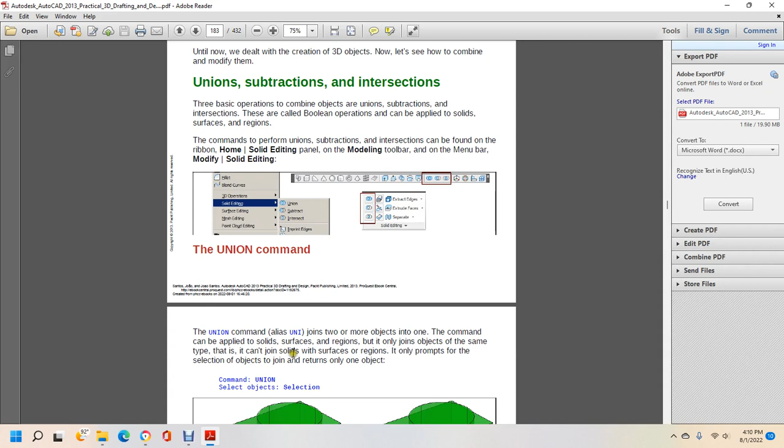The union command, alias UNI, joins two or more objects into one. The command can be applied to solids, surfaces or regions, but only objects of the same type. That is, it can't join solids with surfaces or regions. It only prompts for the selection of objects to join and returns only one object. Command: UNION, select objects.

Duplicated volumes are removed. The command can be applied to solids and regions that do not share a common volume or area. In this case, we get one object despite having separated volumes. For 3D meshes, upon selection the command prompts the conversion to solids or surfaces.

Applying union to surfaces is of minimum interest; in case we need to perform operations on surfaces, the commands presented in Chapter 12, Meshes and Surfaces, are more useful.

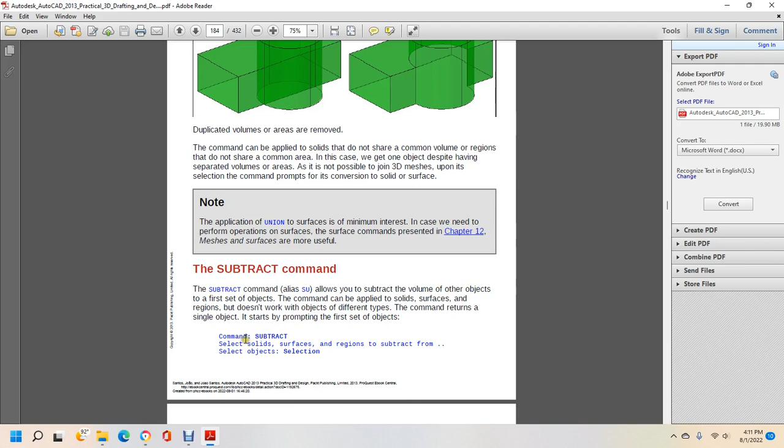The subtract command, alias SU, allows you to subtract the volume of other objects from a first set of objects. The command applies to solids, surfaces and regions and does not work with objects of different types. The command returns a single object and starts by prompting for the first set of objects. Command: SUBTRACT. Select solids, surfaces or regions to subtract from, select objects.

Then it prompts you for the second set of objects. This volume set will be removed from the first. Select solids, surfaces or regions to subtract, select objects.

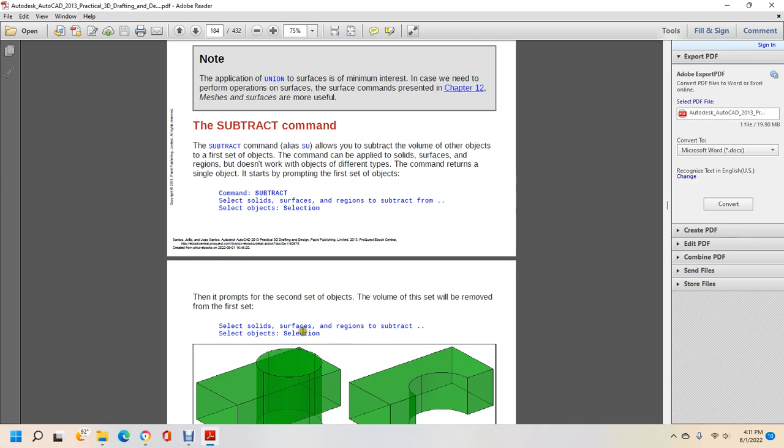Since version 2010, this command allows subtracting coplanar surfaces, and also subtracting a solid from a surface. Applying the command to subtract non-coplanar planar surfaces results in erasing the second set of surfaces, while nothing happens to the first set.

The intersect command, alias IN, allows the intersection of objects. Applied to solids, it returns the common volume; applied to regions or coplanar surfaces, it returns the common area; applied to non-planar surfaces, it returns the intersecting spline. The command just prompts for the selection of objects and returns only one object. INTERSECT, select objects.

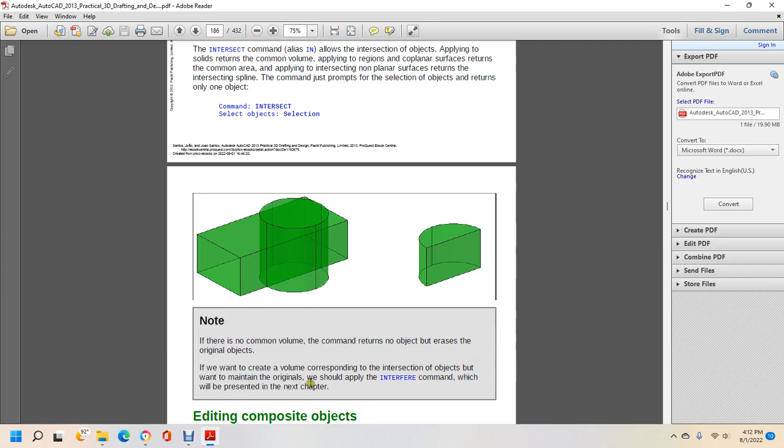Note, if there's no common volume, the command returns no object but erases the original objects. If you want to create a volume corresponding to the intersection of objects but want to maintain the originals, we should apply the interfere command, which will be presented in the next chapter.

Editing composite objects. Under some conditions we are able to modify the original components of a composite object. Composite objects obtained by union, subtraction, intersection have a recorded history that keeps track of the original components. We may edit them by modifying these components. With recorded history we have access to the original components. We may select the solids to combine and set History to Record on the Properties palette.

By default, solids do not record history. If we want all solids to record history upon their creation, we have to change the SOLIDHIST variable to 1. By default, it is 0.

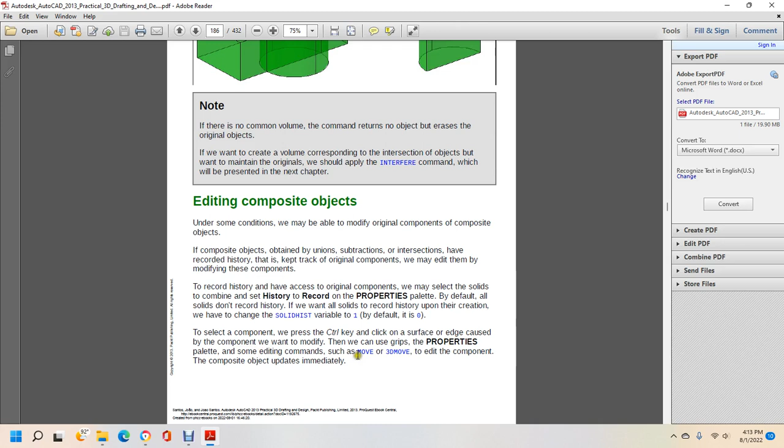To select a component, we press the Ctrl key and click a face or edge of the component we want to modify, then we can use grips, the Properties palette and some of the editing commands, such as MOVE or 3DMOVE, to edit the component, and the composite object updates immediately.

The SHOWHIST variable specifies whether component objects are displayed even if we don't select them with the Ctrl key. With value 2, component objects are always displayed. With value 1, it depends on the individual properties. With value 0, they are never displayed.

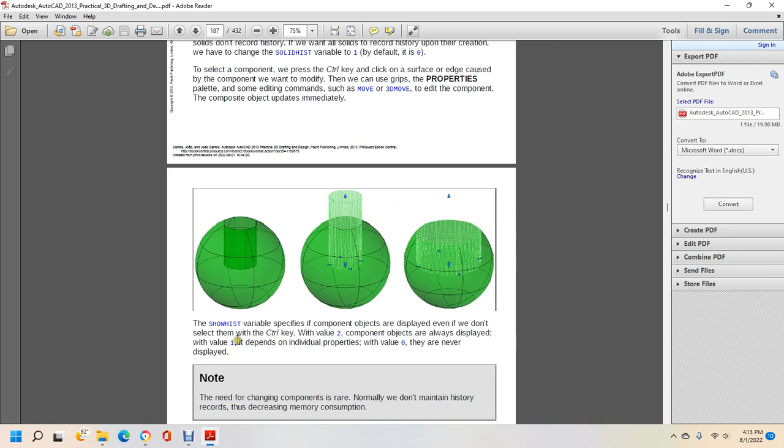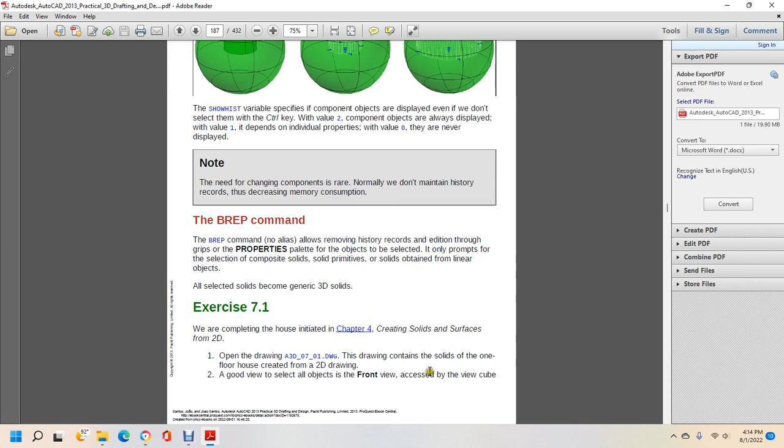Exercise 7.1. We are completing the house initiated in Chapter 4, creating solids and surfaces from 2D, opening the A3D 0701 drawing, containing the solids of the one-floor house, created from the 2D drawing, with the front view accessible by the ViewCube. Unite all walls and solids above the doors with the UNION command, selecting all 18 solids of the 3D walls by a crossing window from right to left, above the windows and below the upper slab.

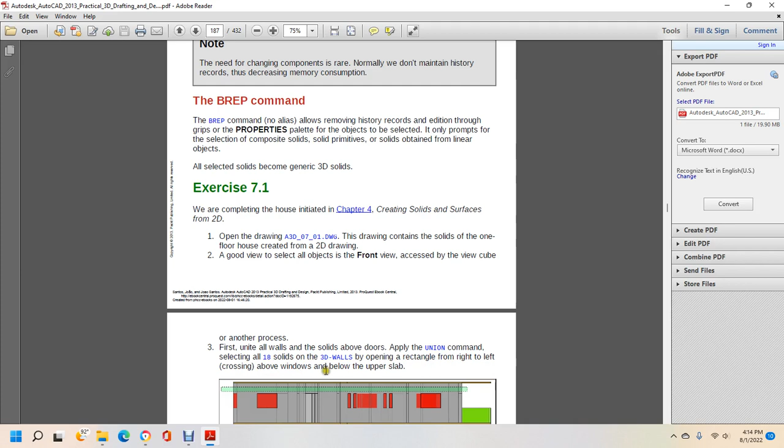We apply SUBTRACT to select all object walls. Press Enter and select all windows from left to right. Include all the windows completely. Orbiting, eventually hiding the upper slab, we can verify the model's correctness. Save the drawing with the name A3D 0701 final.

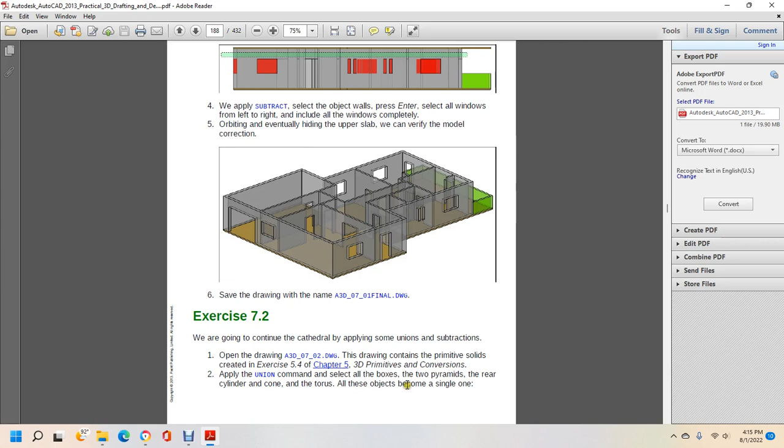Exercise 7.2. We're going to continue the cathedral applying the same union and subtraction. Open the A3D 0702 drawing. The drawing contains primitive solids created in exercise 5-4, Chapter 5, 3D primitives. Apply the UNION command. Select all the boxes, 2 pyramids of the rear, cylinder, cone, and torus. All these objects become a single one, and create the buttress.

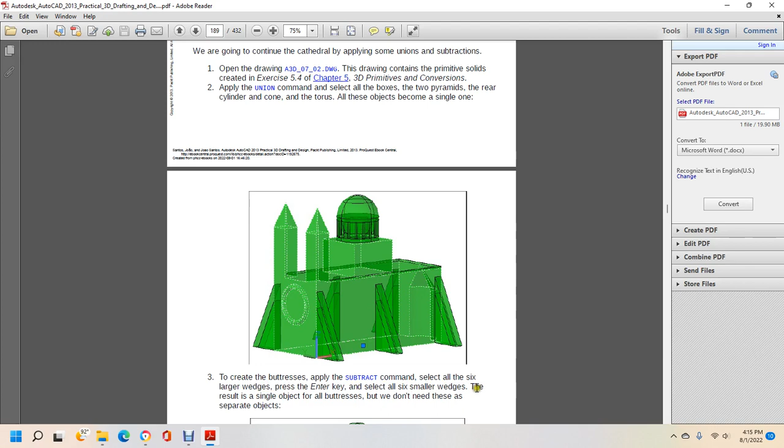Apply the SUBTRACT command. Select all the 6 larger wedges, press the Enter key. Select the 6 smaller wedges and resolve into a single object. All buttresses will be needed; we don't need these as separate objects. And then we save the drawing with the name A3D 0702 final. Later we will cut the summit and make a hollow in the big block.

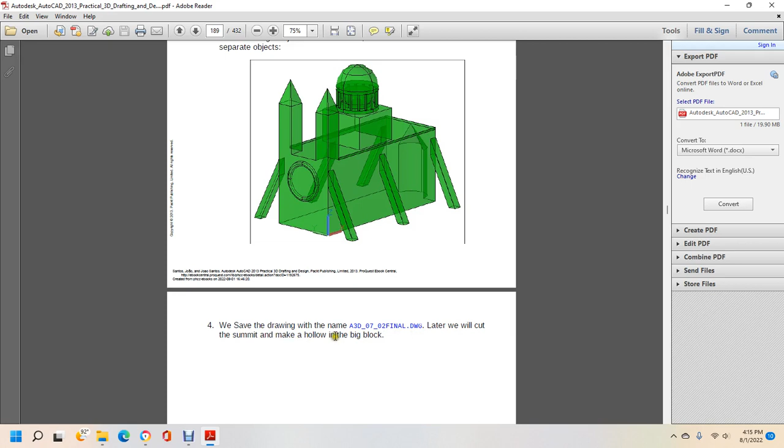We start the command selecting the object to cut: command SLICE, select objects to slice. By default, you define a vertical cutting plane specified with 2 points. Specify start point of slicing plane or planar object, surface, Z-axis, view, XY, YZ, ZX, or 3 points. Specify second point on plane. Then we specify the point indicating the part we want to maintain: specify a point on the desired side, or keep both sides.

Alright, several useful options are available for this command. Planar object: the cutting plane is defined by a planar object to be selected, such as a circle, ellipse, arc, 2D spline or 2D polyline. The surface option allows you to specify a non-planar cutting object, selecting surfaces that intersect the whole objects to be sliced.

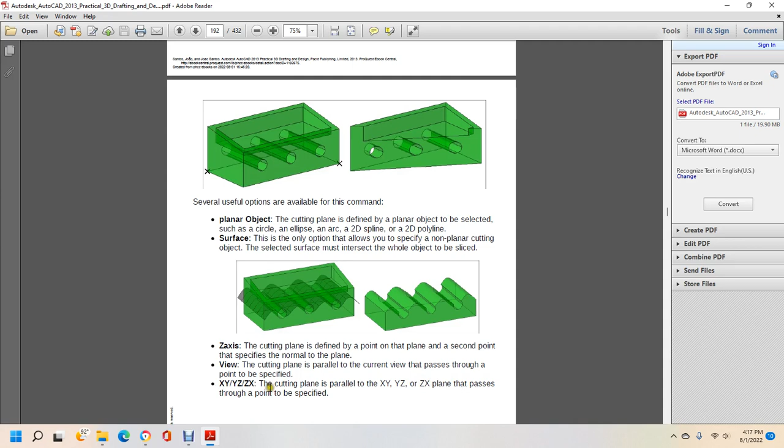Z-axis: the cutting plane is defined by a point on the plane, and the second point specifies the normal of the plane. View: the cutting plane is parallel to the current view and passes through a point to be specified. XY, YZ, ZX: the cutting plane is parallel to XY, YZ, or ZX, a plane that passes through a point to be specified. Alright, and this shows your XY, YZ, and ZX.

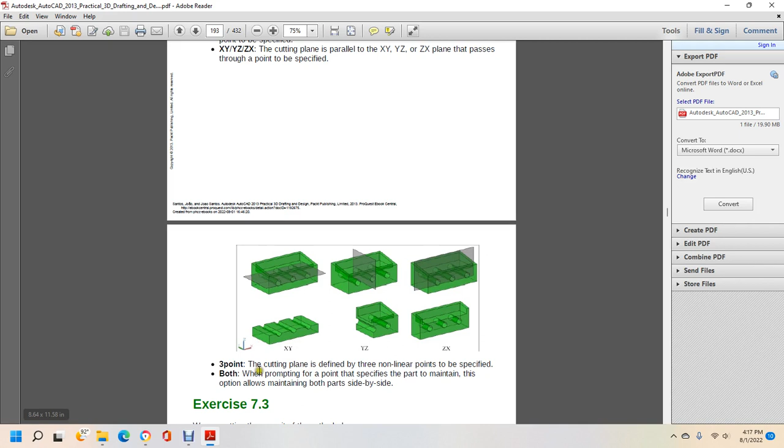A 3-point cutting plane is defined with 3 non-linear points, specified with the prompt for the part to maintain, with options allowing you to maintain parts side by side.

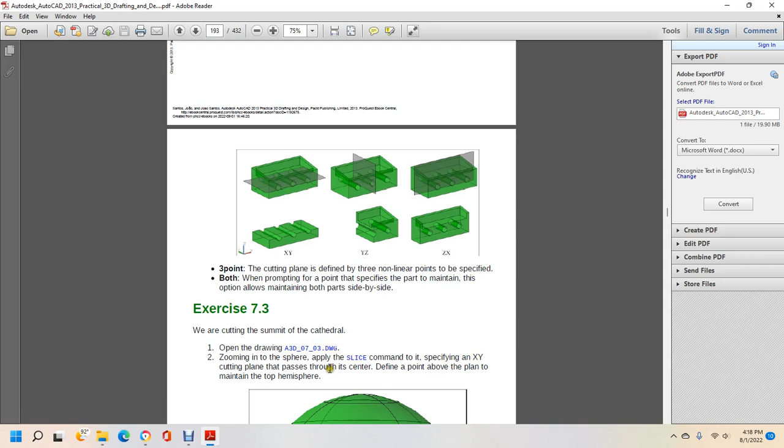Exercise 7.3: cutting the summit of the cathedral. Open drawing A3D 0703, zoom in on the sphere, apply the slice command to it, and specify the XY cutting plane passing through the center to define a point above the plane, in order to maintain the top hemisphere. Save the drawing named A3D 0703 final. Later we will finish this building.

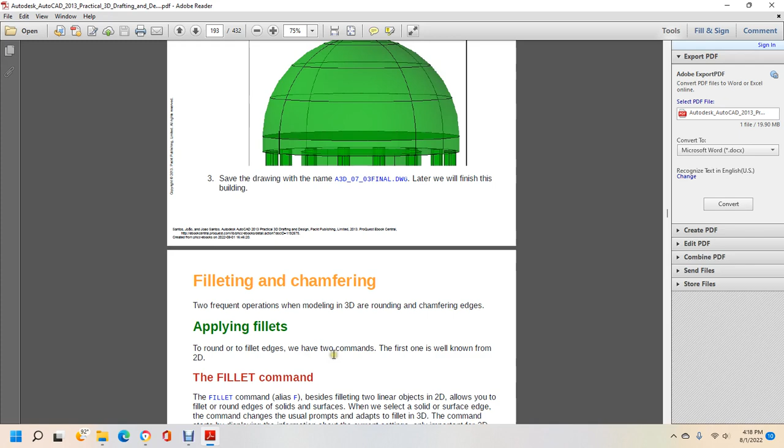Fillet and chamfer are two frequent operations in 3D modeling: rounding and chamfering edges. To apply fillets and round the edges, we have two commands. The first one is well known from 2D: the fillet command, with alias F.

Besides filleting two linear objects in 2D, it allows you to fillet and round edges. For solid surfaces, select the solid and surface edge option of the command, which changes the usual prompt for the 3D fillet command. The command displays information about the current settings, and the only important prompt is the selection of the first object.

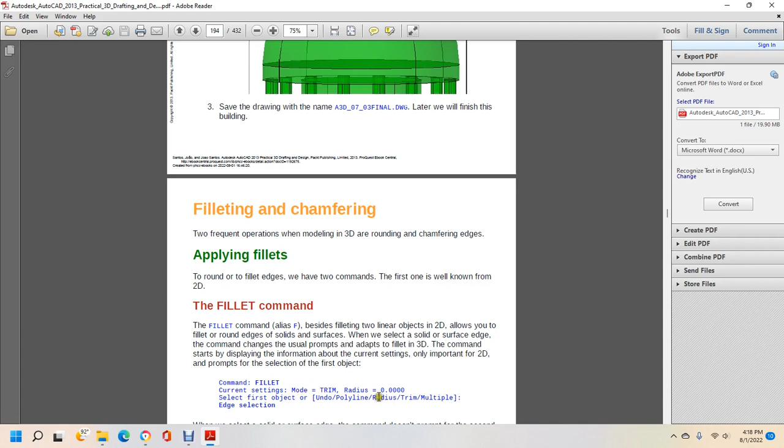Fillet current settings: mode, trim, radius. Select first object, undo, polyline, radius, trim, multiple edge selections. When you select the solid surface edge option of the command, it does not prompt for a second object, but instead prompts for the radius - enter the radius as an expression or value.

Then we click all the edges to be filleted one by one. Only one from the selected solid surface edge, picked for the object selection, already belongs to the selection. After selection, all edges are filleted and the command displays information.

Select edge, chain, loop, or radius for edge selection or for fillet, and it shows the fillet radius at the bottom. Note: for internal edges, the fillet adds material; for external edges, the fillet removes material.

Note: if the edge is internal, the fillet adds material. If the edge is external, the fillet removes material.

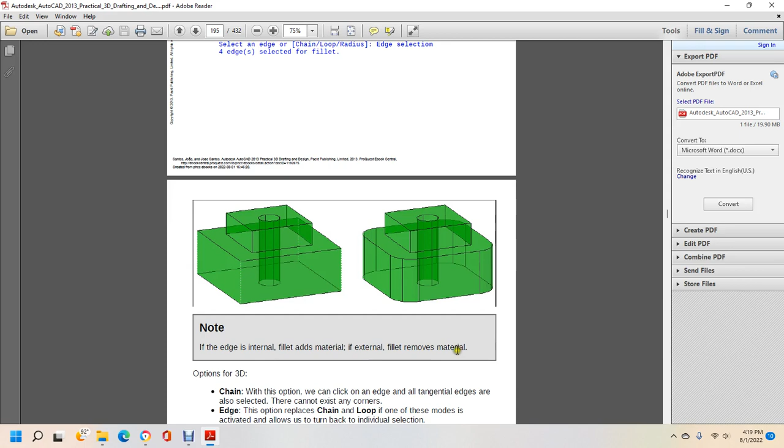Options: Chain - with this option, when we click an edge, all tangent edges are also selected; they stop at any corners. Edge - this option replaces chain or loop; if one of those modes is activated, it allows us to return to individual selection.

Loop - this option allows selecting a sequence of edges, even non-tangent ones, as edges shared by two faces, and prompts you to accept the highlighted face or choose next.

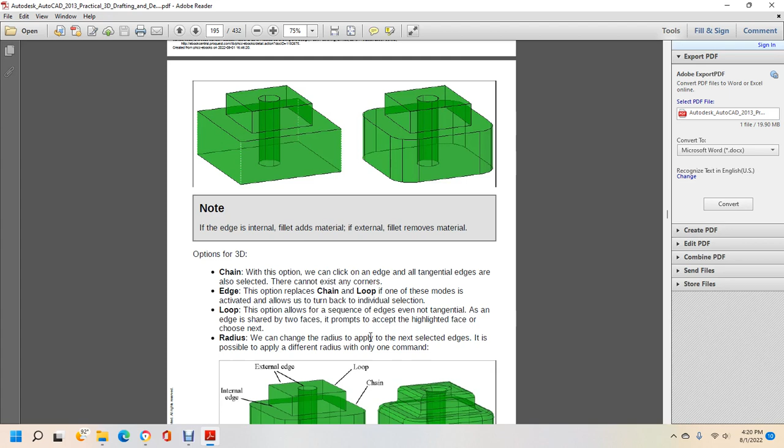Radius - we can change the radius to apply to the next selected edges. It is possible to apply different radii within only one command: the fillet edge command. I'm going to pause the tape there.

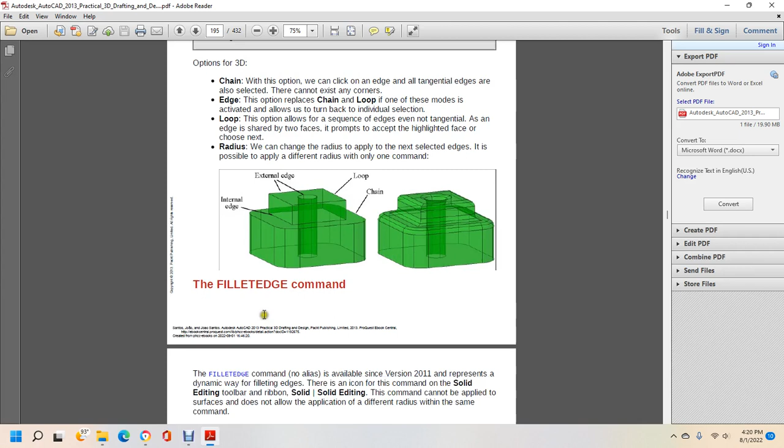Now, the fillet edge command. The fillet edge command, with no alias, is available since version 2011. It's a more dynamic way of filleting edges. There's an icon for the command in the solid editing toolbar and ribbon solid editing. This command cannot be applied to surfaces, and it does not allow applying different radii within the same command.

The command displays the current default radius prompt. The edge selection is repeated until Enter is pressed, and a preview is applied to the model. Command: fillet edge, radius default, selection edge, chain, loop, and radius selection.

Select edge, chain, loop, radius selection. Two edges selected for fillet. Solid display transparent. We press enter to select the grip default radius.

Apply the radius option: click and drag the small triangular grip to dynamically specify the radius, then press enter to accept the fillet and radius, or drag the grip. Specify radius or exit, and finally we press enter to accept the fillet and radius, then enter again.

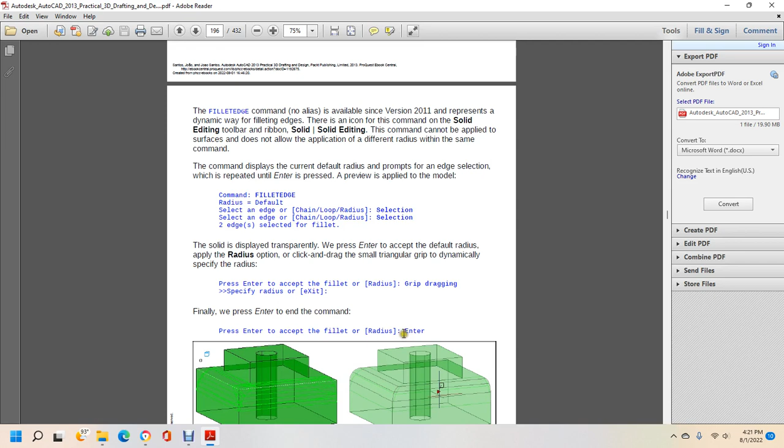The options of this command are similar to the previous command: Chain - the option for selecting the chain, clicking on edges, all tangent edges are also selected, and corners stop the selection. Edge - replaces chain and loop; if one of these modes is activated, it allows you to turn back to individual selection.

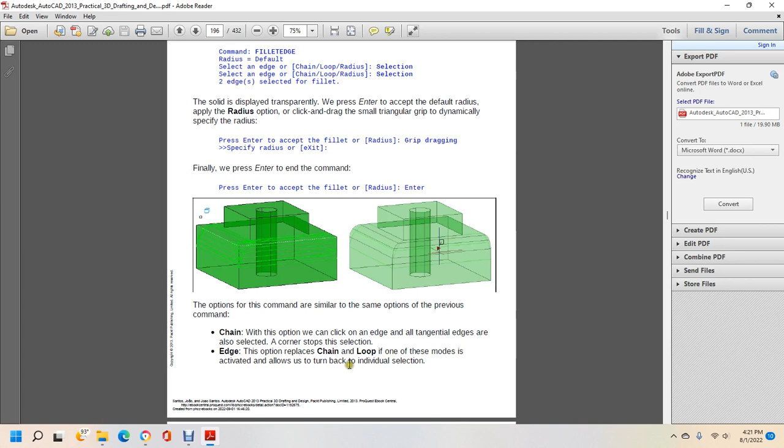Loop - the option allows you to select a sequence of edges that are even non-tangent, as edges shared by two faces, and prompts you to accept the highlighted face or choose next for the radius.

We change the default radius for all selected edges. The FILLETRAD3D variable keeps the last used radius for this solid and surface fillet command, and the PREVIEWCREATIONTRANSPARENCY variable controls the preview transparency.

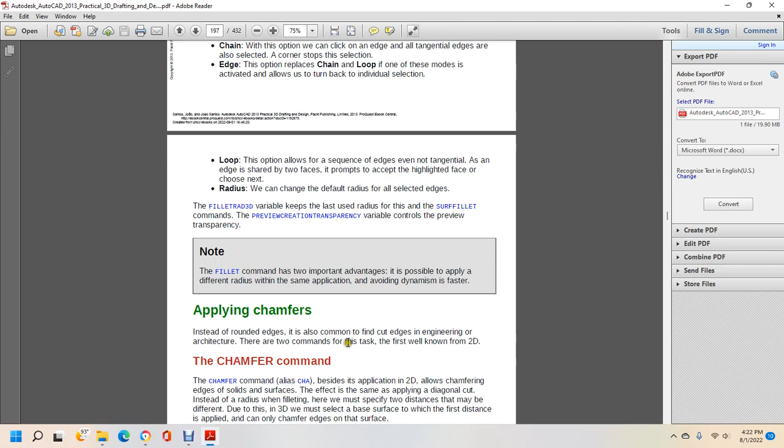Alright, applying chamfers instead of round edges is almost commonly found with the cut edge of engineering and architecture, with two commands for the task. The first, well-known in 2D, is the chamfer command, alias CHA. Besides the 2D application, it allows chamfering edges for solids, applying a diagonal cut.

Instead of the radius when filleting, you must specify two distances that may be different due to this. In 3D, you must select the base surface of the solid for which the first distance is applied. You can only chamfer edges on the surface.

We select the edge of the solid surface and the command displays different options, starting with the selection of the base surface. Command chamfer: trim mode, current chamfer distance, and distance 2. Select first line or undo, polyline, distance, angle, trim method, multiple selection, base surface selection.

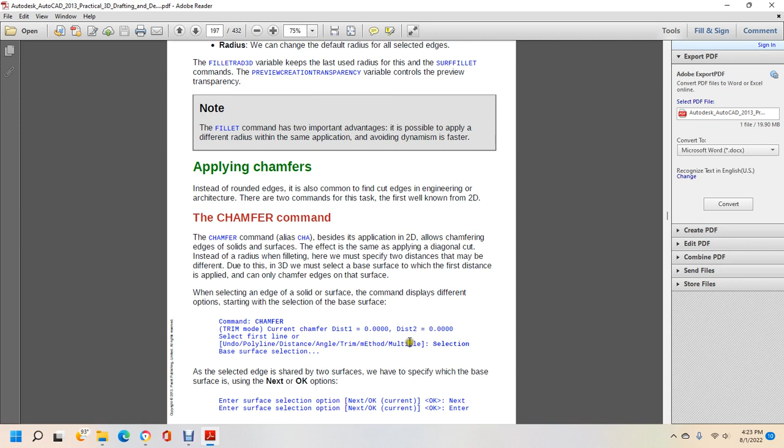As the selected edge is shared by two surfaces, we have to specify which base surface is used, by next or OK options. Enter surface selection option, next or OK or current, enter.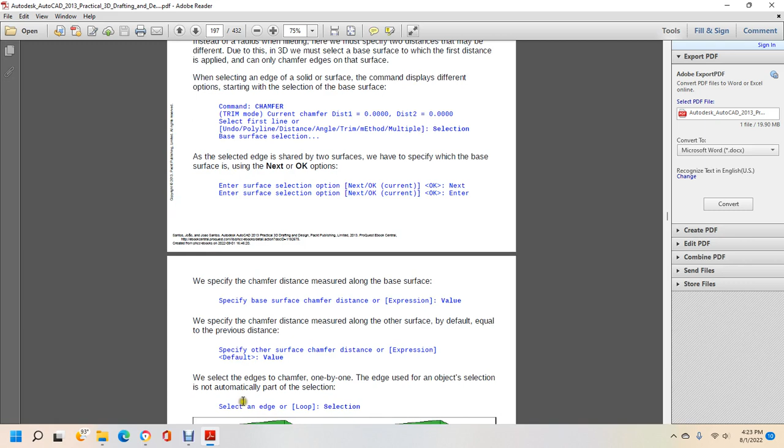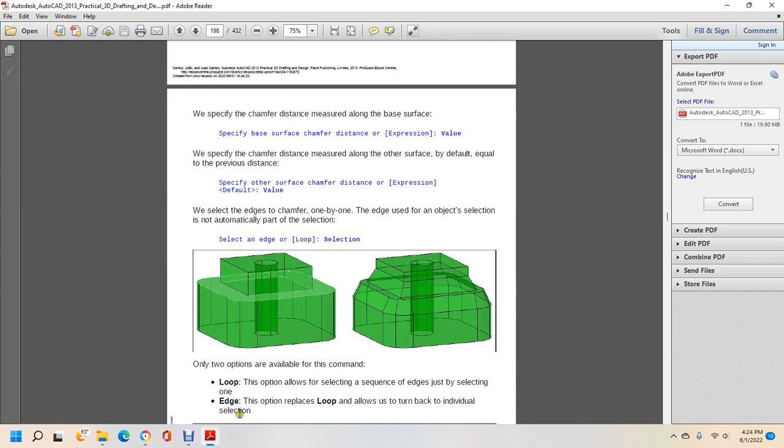Now we select the edge and chamfer one by one. The edges used for the object selection are not automatically part of the selection. Select edge or loop selection, and then it shows you that only two options are available for this command: loop, which allows selecting a sequence of edges just by selecting one, and edge, which replaces the loop option and allows you to turn back to an individual selection.

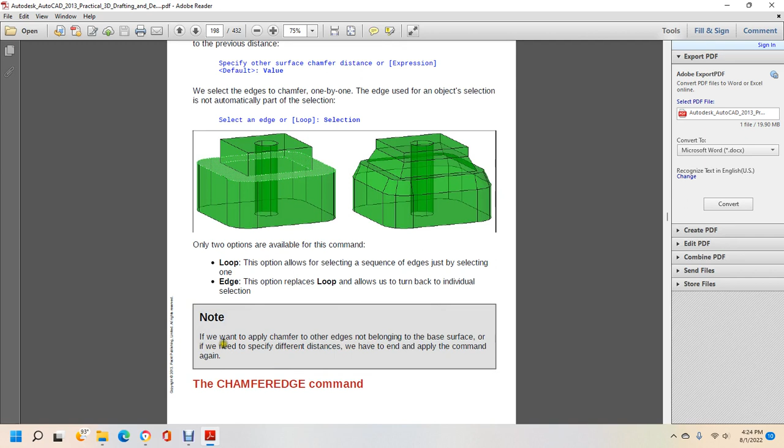If you want to apply chamfer to other edges not belonging to the base surface, we need to specify different distances. We have to end and apply the command again.

Chamfer edge command.

As with fillets, we have a second command to apply chamfer, this one being dynamic. Chamfer edge is the command, no alias, available since version 2011. It represents the dynamic way of chamfering edges. There's an icon command with the solid editing toolbar, ribbon, Solid and Solid Editing. This command cannot be applied with surfaces; the command displays the current default distance at the prompts.

Select an edge: loop, distance. Select another edge on the same face, loop, or distance selection. Once you've selected all your edges, press enter. The solid is displayed transparently with the default distance or the distance option.

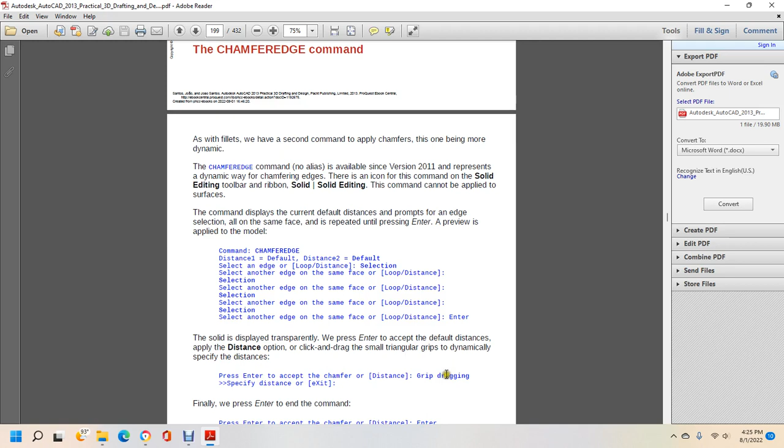Click and drag the small triangular grips to dynamically specify the distance. Press enter to accept the chamfer distance with gripping and dragging, specify the distance, or exit. We press enter to end the command, or press enter to accept the chamfer distance and enter.

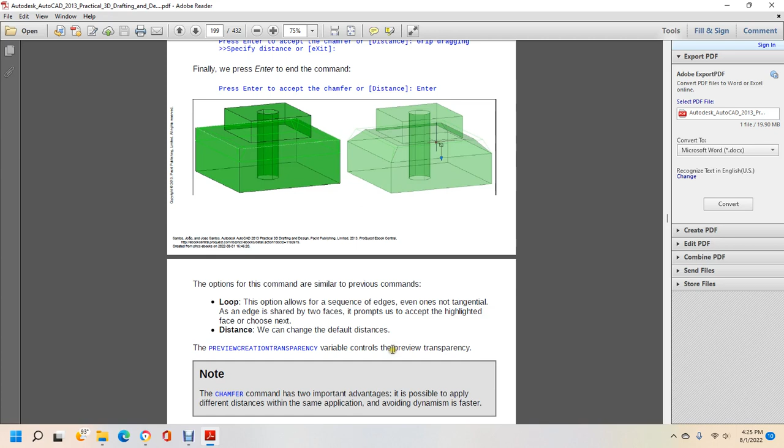These options are similar to the previous command's loop option, which allows you to select a sequence of edges, even ones with non-tangent edges shared by two faces, at the prompt. You accept the highlighted face or choose next. In distance, we change the default distance; preview creation transparency is a variable to control the preview transparency. The two important advantages of the chamfer command are the possibility to apply different distances in the same application, avoiding dynamism, and being faster.

Alright, exercise 7-4. We're going to fillet and chamfer the edges of the bathtub, following drawing A3D0704. I'll apply the fillet command with a radius of 0.003 to all edges coming from the smaller box.

We'll subtract the bottom edge of the piece with the chamfer command, with distances of 0.505 and 0.1. The loop option, as always, is an easy way to select all four edges. Finally, apply the fillet command to all the exterior vertical edges of the sign with a radius of 0.06.

Save the drawing as A3D0704 final drawing.

Editing solids and surfaces: there are prompts to edit solids and surfaces, namely changing parameters or properties using the Quick Properties palette and the Solid Edit command, which offers several useful options.

After solid or surface creation, it is very easy to change parameters with the Properties or Quick Properties palette. The Properties command, alias Control-1, is one of the most useful in AutoCAD. It's also excellent for modifying parameters that define a solid or surface, with a floating palette that can remain visible, displaying the parameters of the selected object.

When a solid is selected, there are three panels related to 3D: 3D visualization, geometry, and solid history. The first includes material and shadow display settings, important for rendering. The last includes the history of parameters of the composite object.

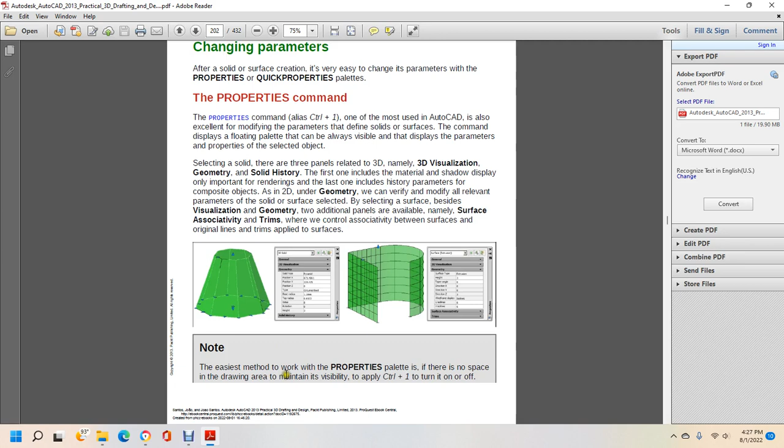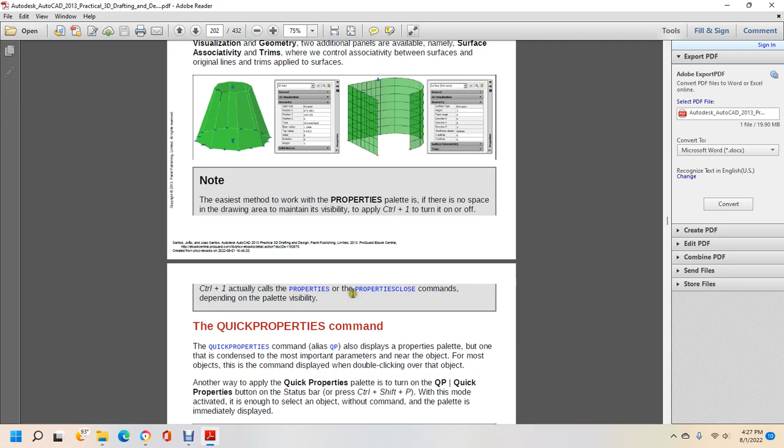The easiest method to work with the Properties palette, if there's no space in the drawing area, is to maintain it with auto-hide and apply Control-1 to turn it on and off. Control-1 actually calls the Properties or the PROPERTIESCLOSE commands depending on its current visibility.

Quick Properties Command: the alias is QP. It also displays a property palette, but considers only the most important parameters of the selected object. For most objects, it can also be displayed by double-clicking over the object.

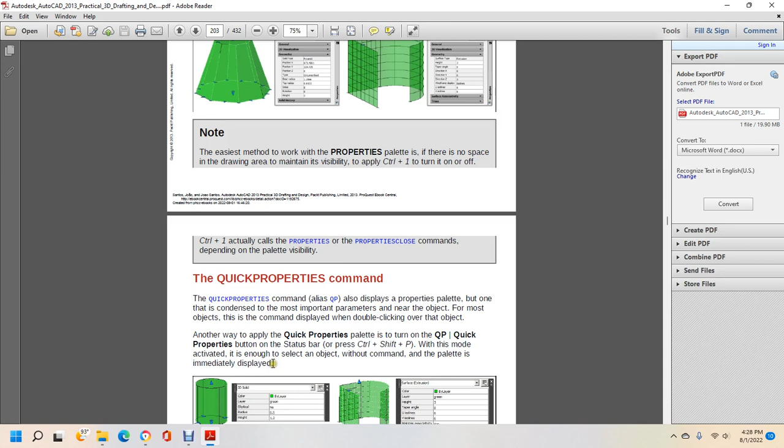Another way to activate the Quick Properties palette is to turn on the QP Quick Properties button on the status bar, or press Control-Shift-P. With this mode activated, simply selecting an object without a command will immediately display the palette.

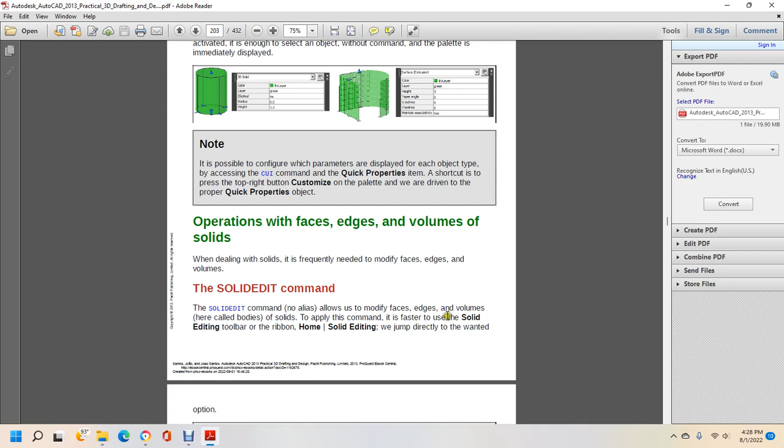To apply this command, the fastest way is to use the Solid Editing toolbar or the ribbon, under Home > Solid Editing, so we can jump directly to what we want.

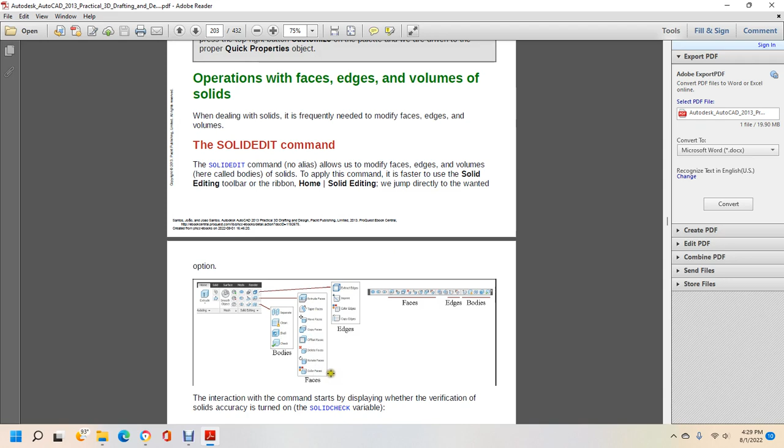The interaction with this command starts by displaying whether verification of solid accuracy is turned on. Solid check is a variable; the Solid Editing command automatically checks it, with Solid Check set to 1.

Next, the main command options display: Undo, to undo the last command option; Exit, to end the command. The remaining options are presented next: entering the Solid Editing options—Face, Edge, Body, Undo, and Exit.

The Face option: upon entering the Face option, we have several additional options, including Undo for the last applied option, and Exit to return to the previous level.

When selecting faces, the Undo and Remove options are available, allowing you to undo the last selection operation or enter the mode to remove faces from the selection.

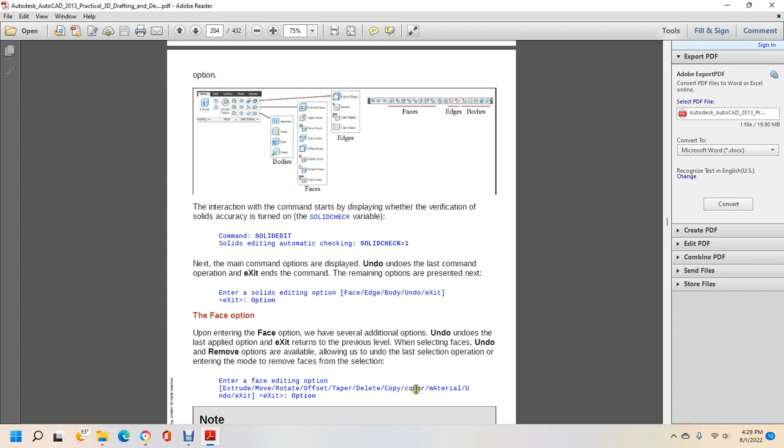The face editing options include: Extrude, Move, Rotate, Offset, Taper, Delete, Copy, Color, Material, Undo, and Exit.

Note that we must be careful when selecting faces: if you click an edge, both faces sharing that edge are selected.

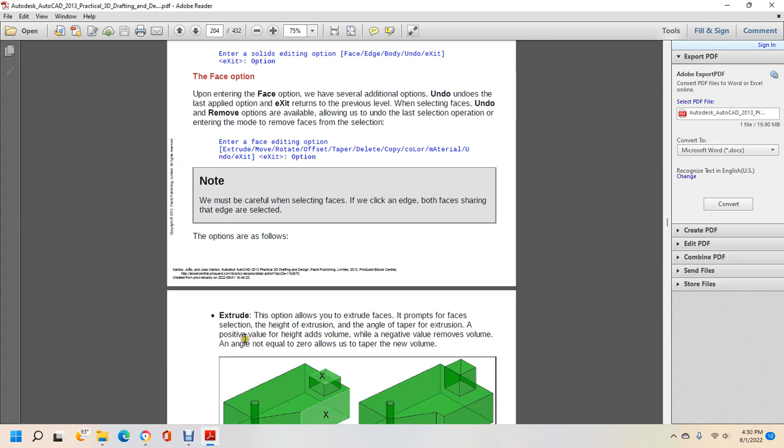The options are as follows. Extrude: this option allows you to extrude the selected faces, prompting for the height of the extrusion and the taper angle. A positive height value adds volume, while a negative value removes volume. An angle not equal to zero allows you to taper the new volume.

Move option allows you to move faces; after selecting, it prompts for the displacement, either as a distance or two points, similar to the Move command.

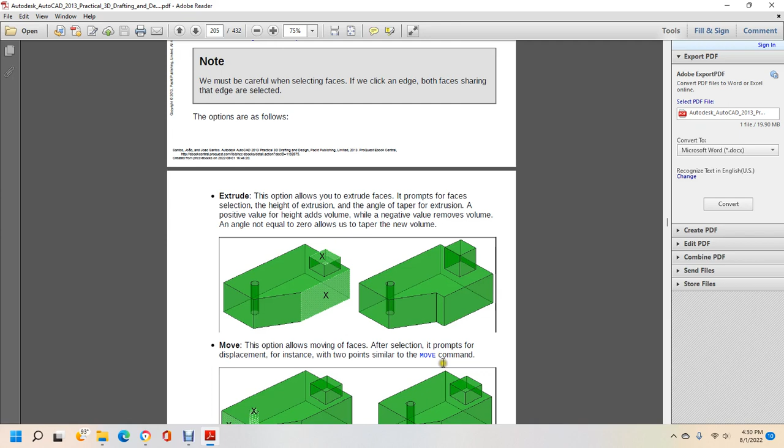Alright, rotate. This option allows you to rotate faces. After selection, it prompts for the axis, rotation angle, and rotation direction. The axis for the rotation by default is specified with 2 points, with additional options that allow you to use an existing object to define its axis, or an axis parallel to the X, Y, and Z axis of the current user

coordinate system. Alright, offset. This option allows the offsetting of faces for the creation of parallel faces. After selection, it prompts for the offset distance. A positive value increases the volume, a negative value removes volume, and when selecting continuous faces with a common edge, the faces extend so that their corner is corrected.

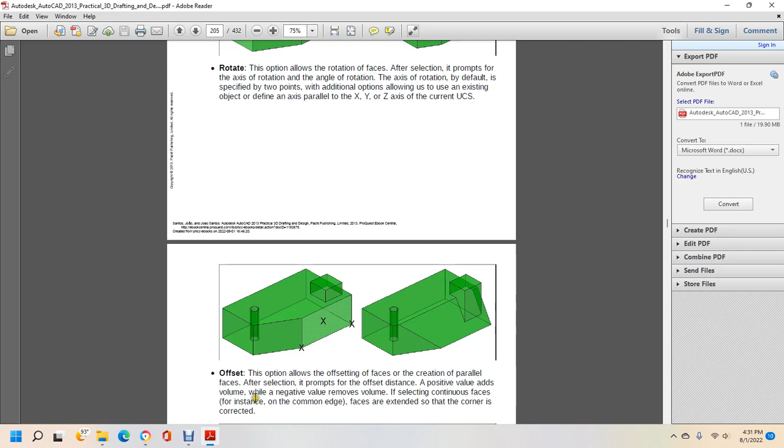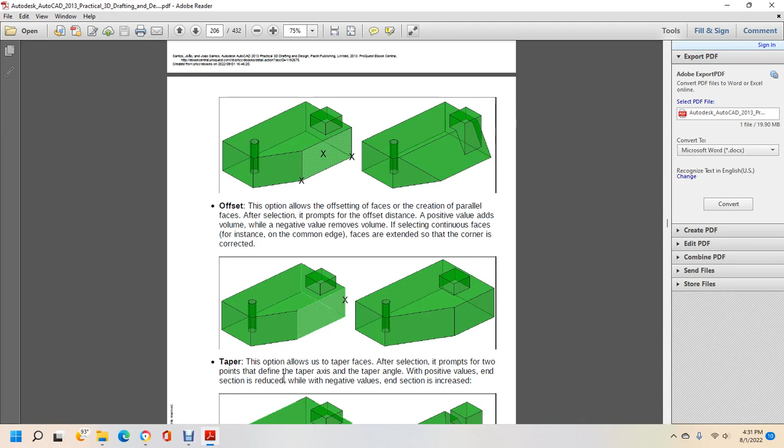Taper. This option allows you to taper faces. After selecting, it prompts for 2 points to define the taper axis and for the taper angle. With positive values the end section is reduced, and with negative values the end section is increased. Delete. This option allows you to delete faces, and AutoCAD will fill the spaces. Faces will be deleted.

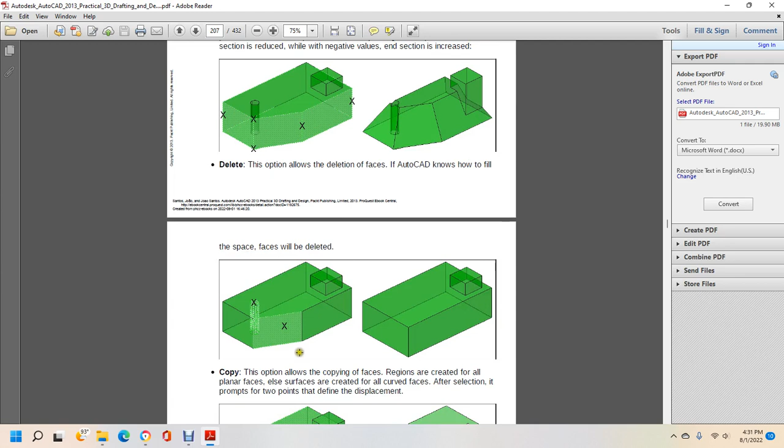Copy. The copy option allows you to copy faces, creating regions from planar faces and surfaces from curved faces. After selection, it prompts for 2 points to define the displacement. Color. This option allows you to change the color of selected faces. After the selection, it shows the select color dialog to choose the color to apply. Material. This option allows the application of material to selected faces.

In rendering, we can have different materials applied to a single object. After selection, it prompts for the name of the material to apply. This option has no icon. The color and material options have limited utility to apply materials to faces. There are other possibilities for which you don't need to type the material name.

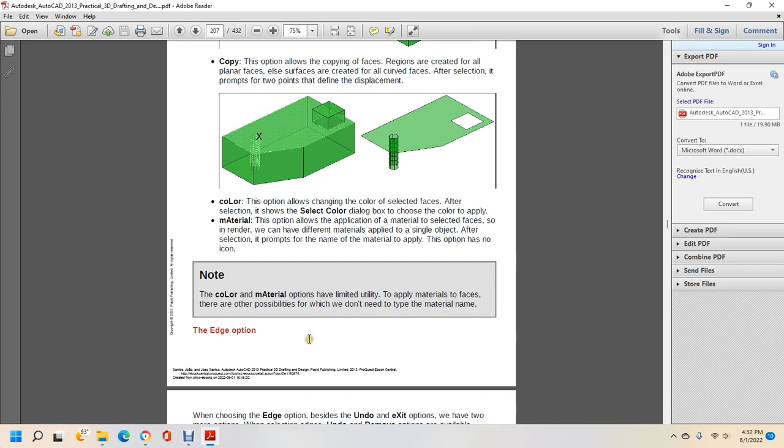The edge option. Choosing the edge option, besides undo and exit options, we have 2 more options. The undo or remove option allows you to undo the last selection operation, entering the mode to remove edges from selection. Enter an edge editing option: copy, color, undo or exit. Copy. This option allows you to copy edges; depending on the selected edges, arcs, circles, ellipses, lines or splines are created. After selecting, it prompts for 2 points that define the displacement.

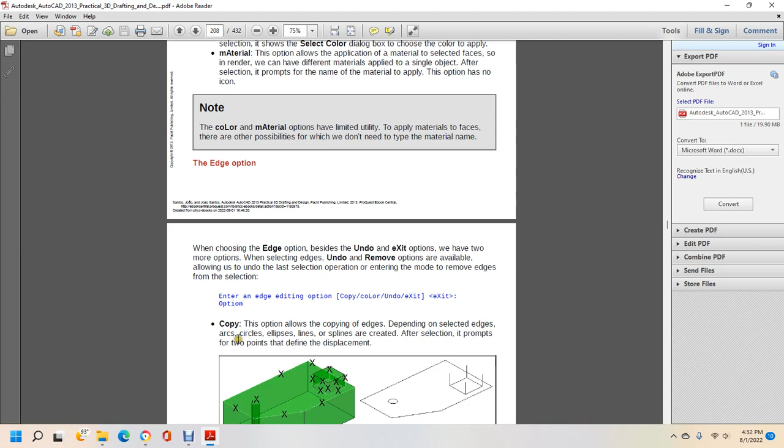Color. This allows you to change the color of selected edges. After selection, it shows the select color dialog box to choose the color to apply. Alright, the body option. The body represents the volume of the solid. Besides undo and exit options, we have more options. Enter a body editing option: imprint, separate solids, shell, clean, check, undo, exit.

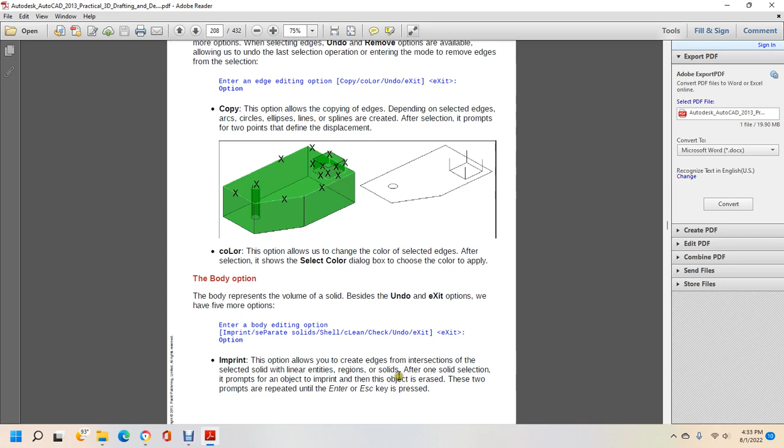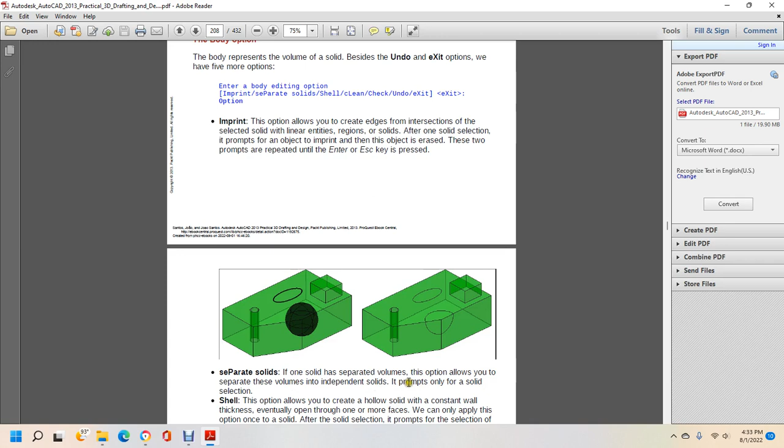Imprint. Imprint allows you to create edges from the intersection of selected solids with linear entities, regions or solids. After one solid selection, it prompts for another object to imprint, and whether to erase the object, and the prompts are repeated until the Enter or Esc key is pressed. Separate solids. If one solid has separate volumes, this option allows you to separate these volumes into independent solids. It prompts only for a solid selection.

The shell. This option allows you to create a hollow solid with constant wall thickness, eventually open through one or more faces. We can only apply this option once to a solid. After the solid selection, it prompts for selection of faces to remove, thus creating an open thin wall solid, and for the shell thickness. A positive thickness creates the shell on the inside, while a negative thickness creates a shell on the outside.

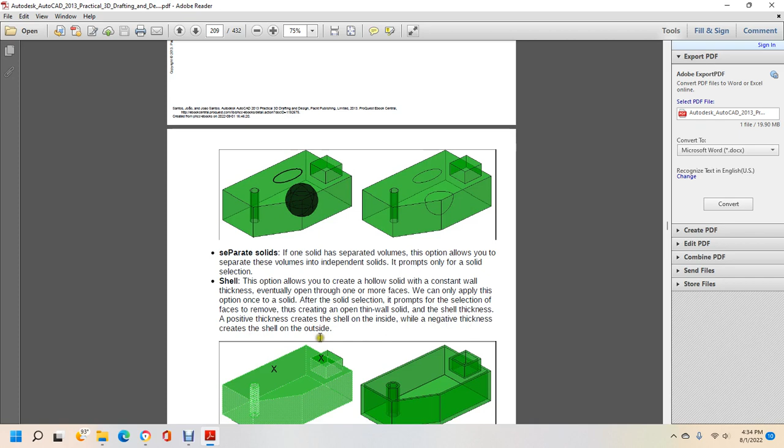Note, we must be careful with this option. Immediately after the solid selection, it prompts for face removal. If we press Enter, we remove no faces. If we need some walls with a different thickness after the shell, we may apply the move, extrude or offset face options. Clean. This option allows you to remove redundant edges and vertexes, but does not remove edges coming from the imprint option. Check. This option verifies whether the solid is valid and prompts only for a solid selection.

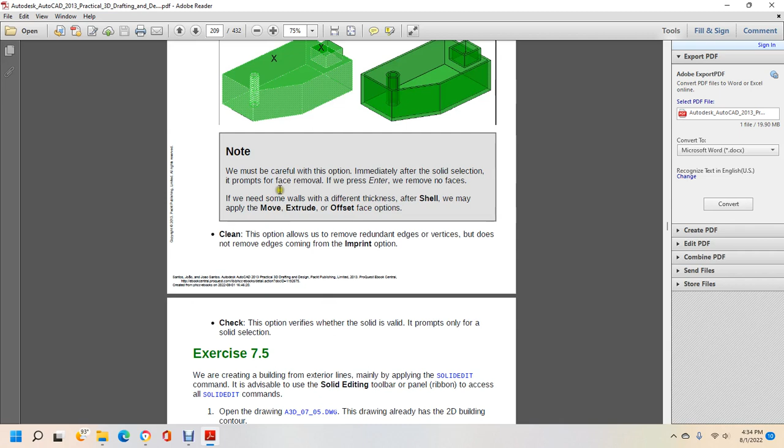Alright, exercise 7-5, creating a building's exterior lines, applying solid editing commands. It's advisable to use the Solid Editing panel of the ribbon to access solid edit commands. Open drawing A3D 0705, drawing already with the 2D building contour. Create and activate layer 3D building, color at choice. Use PRESSPULL, click inside the area, specify 24 as the height of the extrusion, and with Enter to end the command, we get the volume of our building.

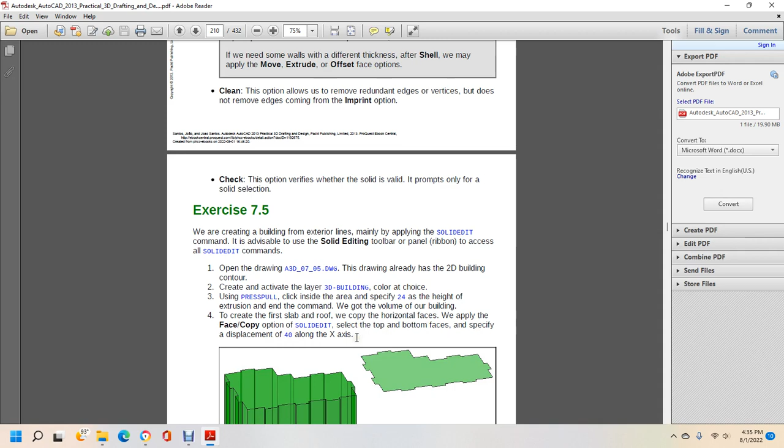To create the first slab and roof, we copy the horizontal faces. We apply the face copy option of the solid edit, select the top and bottom faces, and specify a displacement of 40 along the x-axis. Note, by using a non-wireframe visual style, it's easy to select the top face; orbit, select the bottom face, and if we accidentally select the vertical face, we may use the remove option.

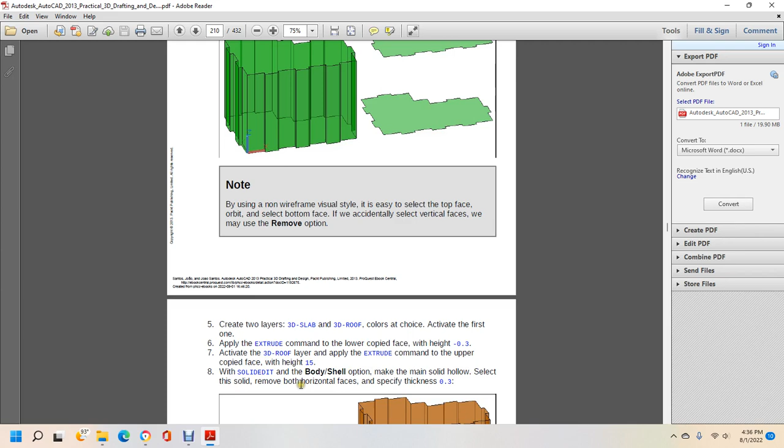Create two layers, 3D slab and 3D roof, colors of choice. Activate the first one. Apply the extrude command to the lower copied face with a height of -0.3. Activate the 3D roof layer. Apply the extrude command to the upper copied face with a height of 15. With solid edit body shell option, make the main solid hollow and select the solid. Remove both horizontal faces and specify a thickness of 0.3.

With the solid edit face offset option, offset the roof vertical faces to the outside. To easily select these faces, use the all option, then the remove option to remove both horizontal faces, and specify the offset value of 0.4.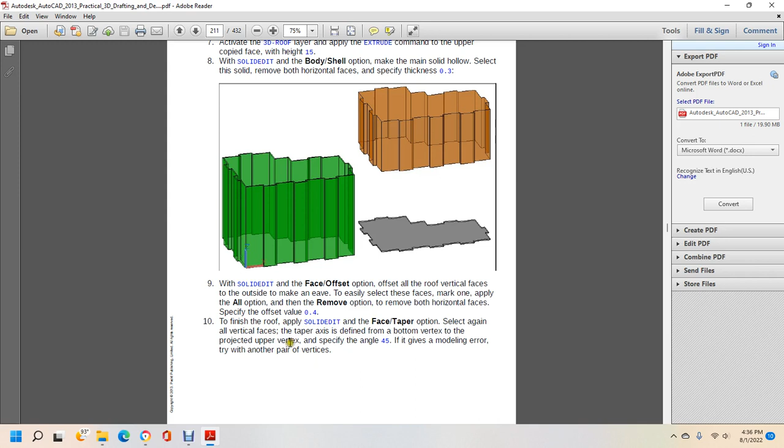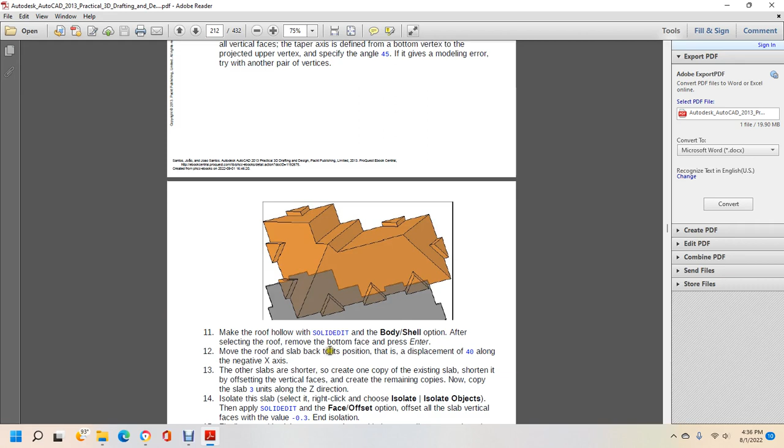To finish the roof, apply the solid edit face taper option, select again all vertical faces; the taper axis is from the bottom vertex to the upper vertex, specify the angle of 45. If it gives a modeling error, try another pair of vertexes. Then you have to make the roof hollow from solid edit with the body shell option. After selecting the roof, remove the bottom face and press enter. Move the roof slab back into position and displace 40 along the -x axis.

The other slabs are shorter, so create one copy of the existing slab and make it shorter by offsetting the vertical faces of the remaining copy. Now copy the slab 3 units along the Z direction. Isolate the slab: select, right click, choose isolate objects, then apply the solid edit face offset option, offset all slab vertical faces by a value of -0.3, and end isolation. Finally, copy the slab 7 more times at the same distance, 3 along the Z direction.

The easiest way to apply this is the copy command array option, 8 elements and a distance of 3. Save the drawing with the name A3D 0705, final drawing.

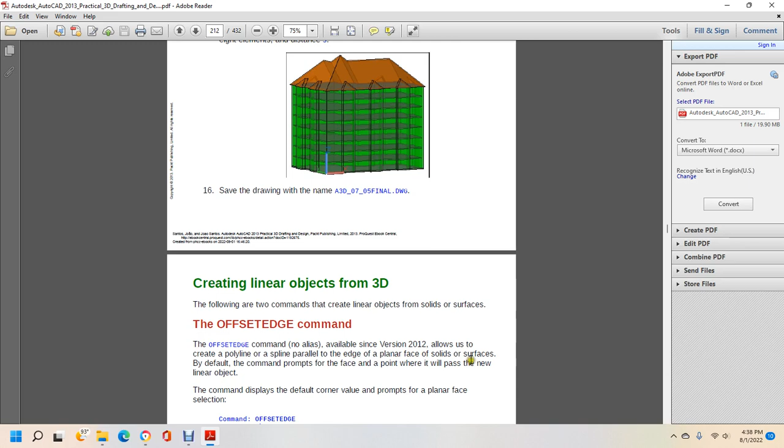Alright, creating linear objects from 3D. There are two commands to create linear objects from solids or surfaces. The offset edge command, no alias, available since version 2012, allows us to create a polyline or spline parallel to the edges of a planar face of a solid or surface. By default the command prompts for the face and the point where the new linear object will pass.

The command displays the default corner value, then prompts for planar face selection: offset edge, corner sharp, select face. Then the default prompt is the point where the new linear object will pass, outward or inward relative to the face edges; specify through point, distance, or corner. The face selection and point prompts are repeated until enter or the escape key is pressed. Select face, enter.

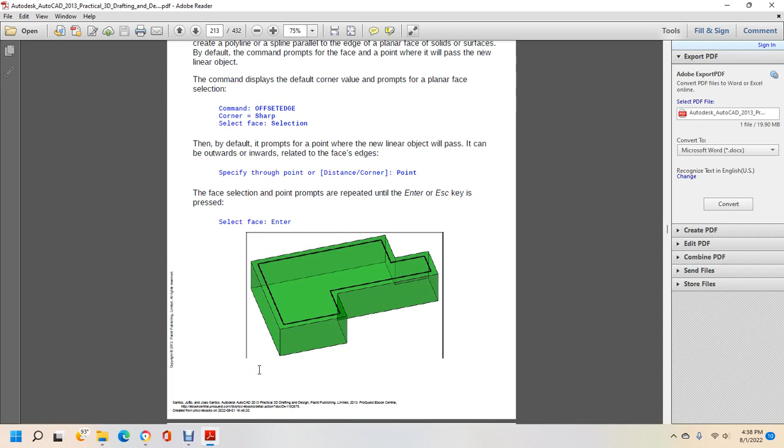The command has the following options. Distance: instead of specifying a point, the option prompts for the distance, then the side on which the offset is made. Corner: the offset outside of the edge, this option controls whether the corners are sharp or rounded. In this case, the radius is equal to the distance. And that was the offset edge command.

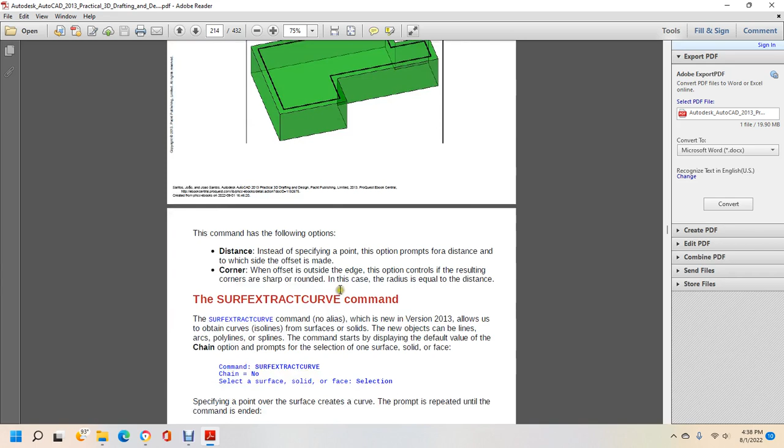Surface extract curve command. The surface extract curve command has no alias and is new in version 2013. It allows us to obtain isoline curves from surfaces and solids. New objects can be lines, arcs, polylines, or splines. The command displays the default value of the chain option and prompts for the selection of a surface, solid, or face. Command: surface extract curve, chain no. Select surface, solid or face. Specify a point over the surface to create the curve. The prompt is repeated until the command is ended.

Extracting isoline curve in U direction. Select point on surface or chain, direction, spline points. Enter.

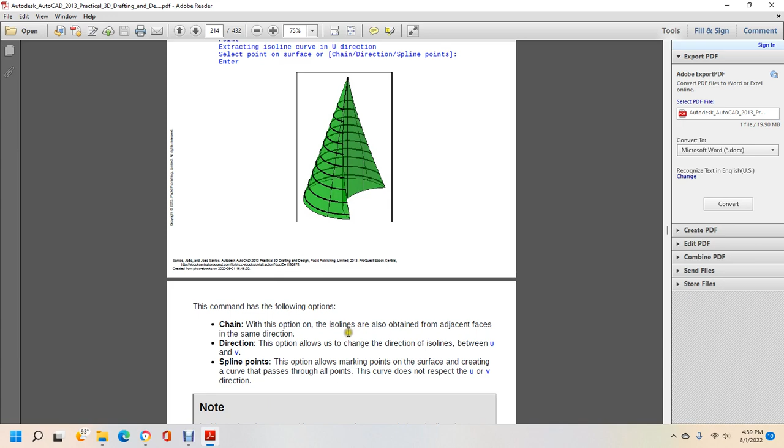The command has the following options. Chain: with this option, isolines are also obtained on adjacent faces in the same direction. Direction allows you to switch the direction of isolines between U and V. Spline points: the option allows you to pick points on the surface, creating a curve passing through all points. The curve does not respect the U and V direction. That was surface extract curve.

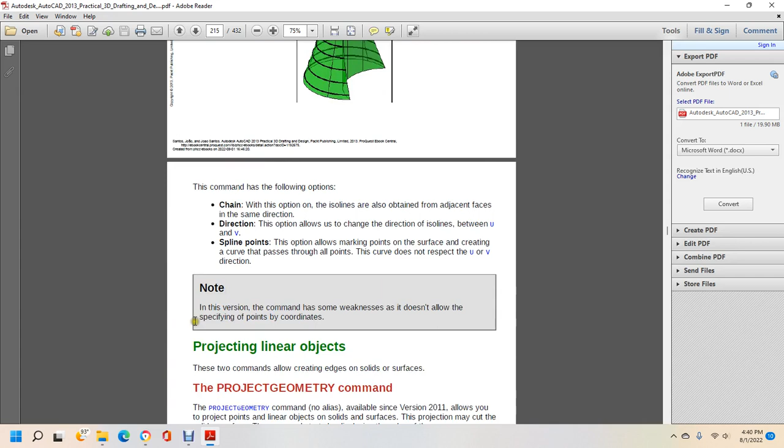Note, in this version, the command has some weaknesses. It doesn't allow specifying points by coordinates. Projection, linear object. The two commands allow creating edges on solid and surface: the project geometry command.

Project geometry command, no alias, available since version 2011, allows you to project points and linear objects on a solid surface. The projection may cut through the solid surface. The command starts with the display of the value of the SURFACEAUTOTRIM variable, prompting selection of curves or points to project. Command PROJECTGEOMETRY. SURFACEAUTOTRIM = 0. Select curves or points.

Projection direction selection. After selection of the object to be projected, select one solid, surface or region for the target of the projection. Finally, we make a projection direction between the viewing direction, the current UCS, or 2 points, specifying the projection direction: View, UCS, Points.

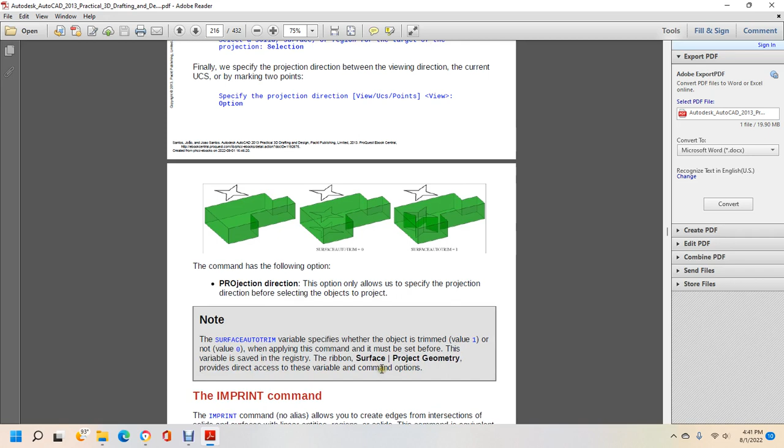And then we have the following options as well as projection direction. The option allows you to specify the projection direction, selecting the objects to project. The SURFACEAUTOTRIM variable specifies whether the object is trimmed, value 1, or not, value 0. When applying this command, it must be set before; the variable is saved in the registry. The PROJECTGEOMETRY command provides direct access to the variable as a command option.

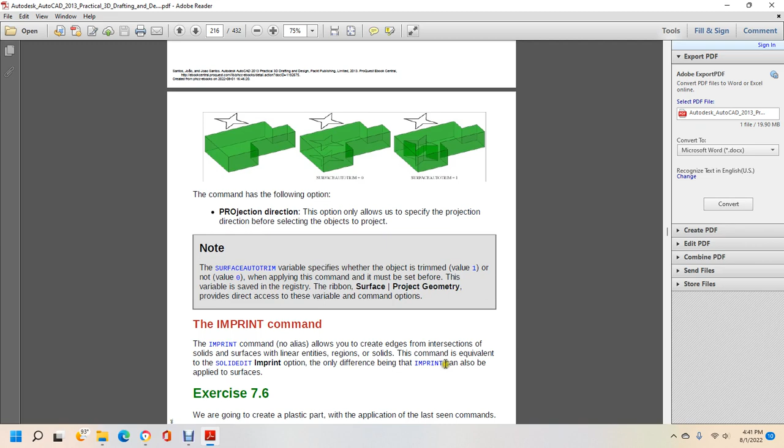The imprint command. The IMPRINT command, no alias, allows you to create edges with the intersection of the solid surface and linear objects, regions, and solids. The command is equivalent to the SOLIDEDIT imprint option, the only difference being that IMPRINT can also be used to apply to surfaces.

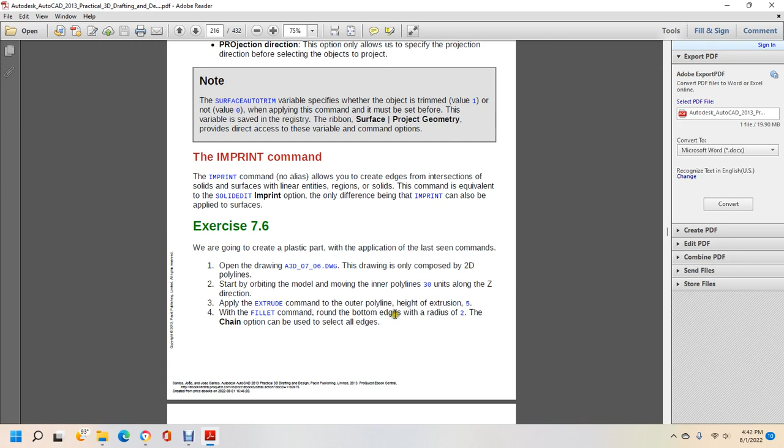Alright, exercise 7.6. We're going to create a plastic part with the application of the last seen commands. Open drawing A3D0706; the drawing is only composed of 2D polylines. Start by orbiting the model and moving the inner polylines 30 units along the Z direction. Use the extrude command with the outer polyline, a height of extrusion of 5. Use the fillet command around the bottom edge with a radius of 2; the chain option can be used to select the edges.

To create a small wall on the top part, start with the offset edge command, selecting the top face, with a point inside, creating a polyline at a distance of 3 units from the edge. With the press pull command, create the wall, specifying a point between the edge and polyline, height of extrusion 10. Before projecting the smaller polylines, verify that the SURFACEAUTOTRIM variable is set to 1.

Finally, apply the project geometry command, selecting all small polylines and the solid, with the UCS option. All polylines are projected onto the solid, cutting it. We may erase or hide these small polylines. Save the drawing as A3D0706 Final.

Alright, editing surfaces. This command is very useful when it comes to assigning thickness to surfaces. The thicken command, no alias, allows you to apply thickness to surfaces, thus creating a 3D solid. The command starts with the prompt for the surfaces to thicken. Command THICKEN, select surfaces to thicken. Then specify the thickness to apply to the selected surfaces; it may be positive or negative. Note, if applying the command causes several self-intersections of the volume, the operation may fail. If it fails, we may try a negative value.

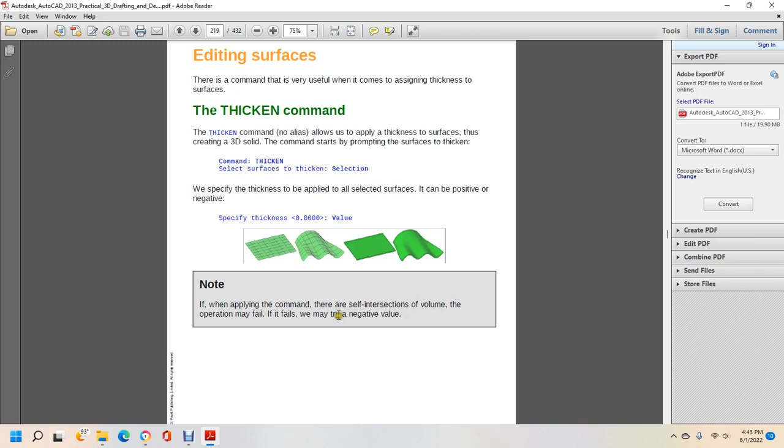Alright, summary. In this chapter we included the main commands for editing solids and surfaces. We started with composing objects: union, subtract, intersect, then editing them with the slice command, the cut object, fillet, and chamfer commands, using the fillet edge and chamfer edge commands, and the properties and quick properties commands to change the parameters. Followed by SOLIDEDIT, which allows you to apply multiple operations on faces, edges, and volumes.

Create linear objects from 3D with the offset edge and extract curve commands; project linear objects onto solid surfaces with the project geometry and imprint commands. Finally, we presented the thicken command to add thickness to surfaces. Next chapter, we will present all commands to acquire 3D objects.

Chapter 8, Acquiring 3D Model. Testing.